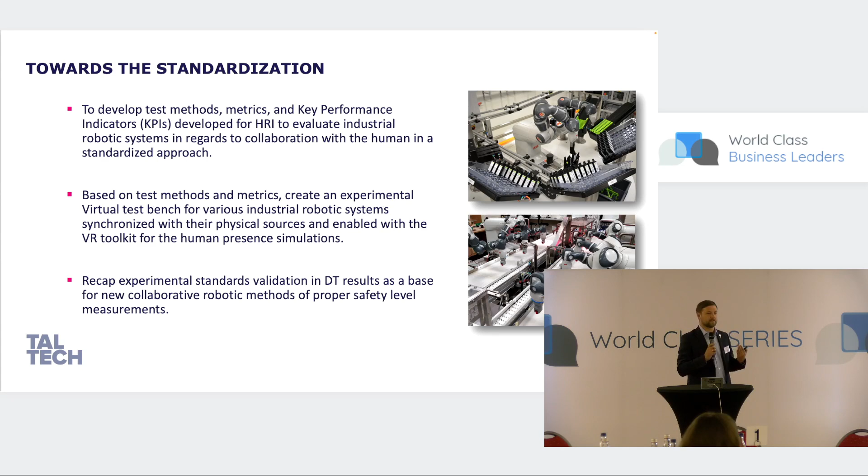The development of this is based in our lab. We have a robotics and flexible manufacturing demo center, which consists of various brand robots, logistical robots, and physical industrial robots. We also work together with a few institutions on this, and we're looking to increase our use cases and have more research, and not only research, but maybe industrial labs in our domain.

We work with some Danish institutions, US institutions, and right now, as I'm in Ireland, also an Irish institution, and we connect them virtually together. They are all copies, digital twins of physical rooms, which we connect virtually by means of social VR - speaking with each other, multiplayer modes, etc. In all of those we collect data - that's the main aim of it.

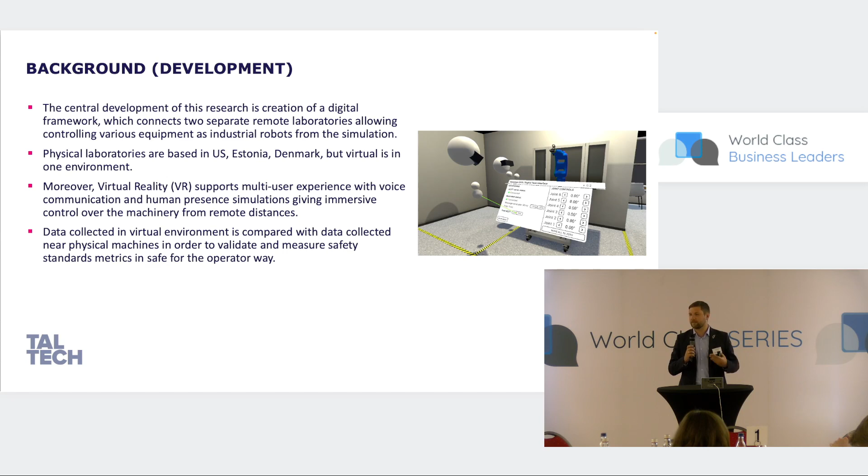We develop it in a modular manner. What we're developing right now is a framework based on a game engine, where if we need to measure, for example, a user's one-off experience with exact sensors, we download the package. So we're making a framework of different packages for user evaluations - but it's work ongoing. That's just a few pictures of our lab and its digital perspective.

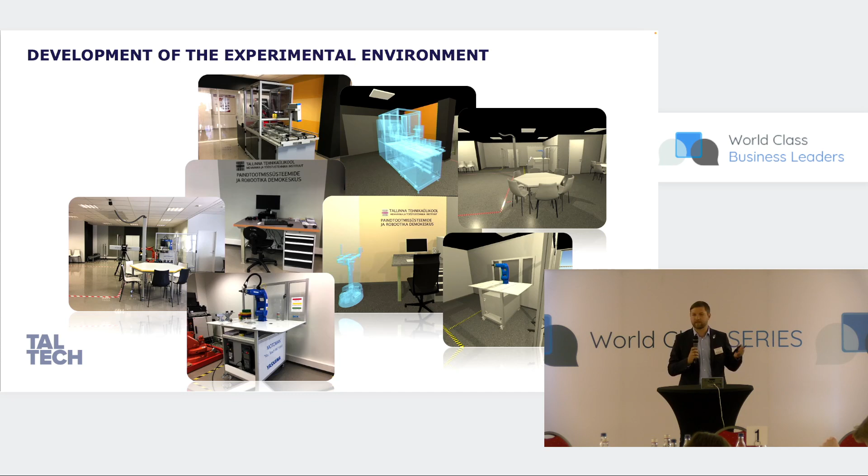It's already been updated, with more robots added. We have two floors of our building digitalized, based on a BIM model. We put it live and made it a multiplayer game where students during COVID could also learn pneumatics. We have some pneumatics and hydraulics games, and robotics applications to run on.

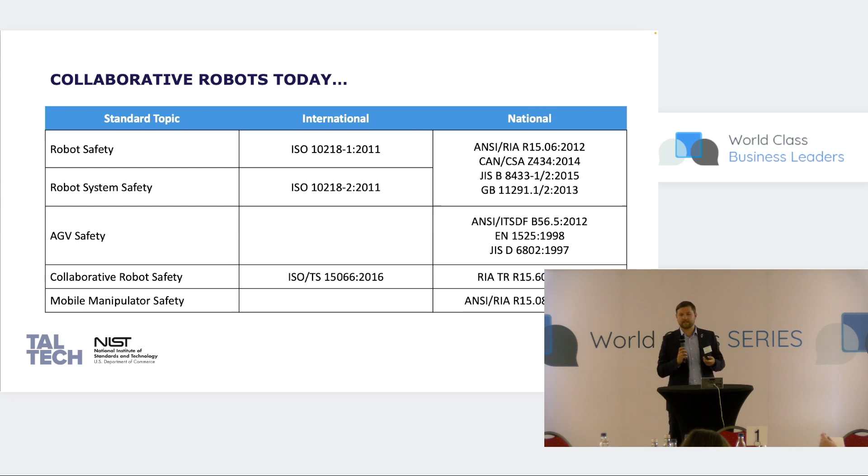Is human-robot interaction a problem? As you can see, there are plenty of different standards regarding collaborative robotics - industrial robots, AGVs (ground robots), drones, UAVs, and various standards. There is no single standard that collects all the general methodologies into one. As we are not standards experts in our institution, we work together with NIST, so these slides are partially borrowed from them, with whom we do some joint publications.

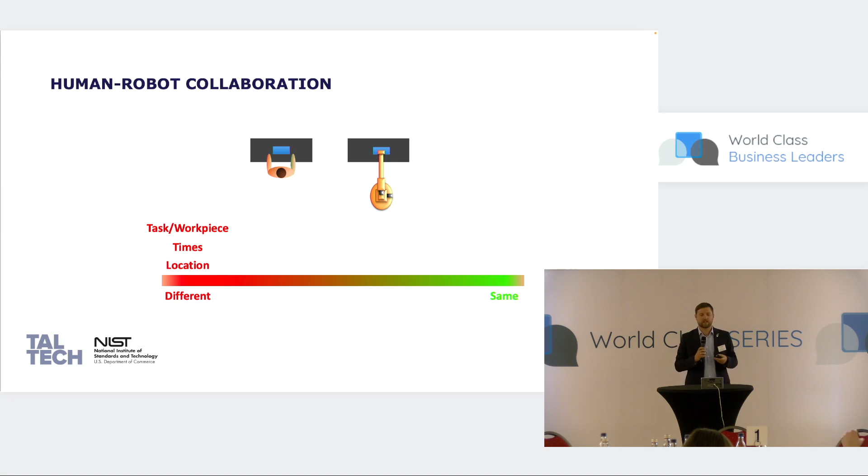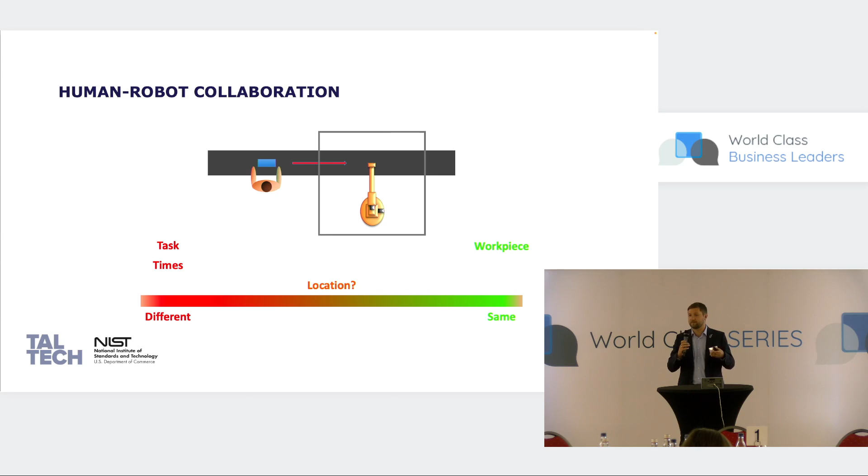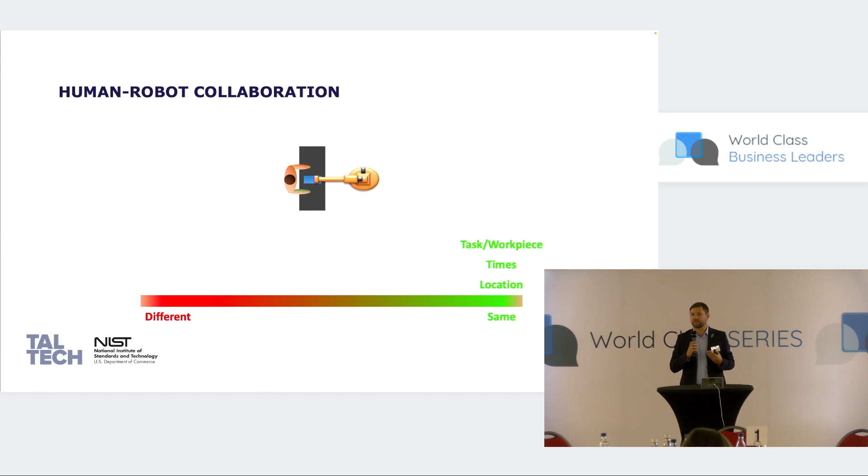But basically there's a need, because robots and collaborative robotics—my main work is on heavy industrial robots, not cobots—but they are inevitable in different domains, not only industrial but also construction and healthcare. Digital twins, and I think the digital twin embedded with virtual reality gives more immersion, as I was speaking today about educational applications, and not only that, they can really be the interaction tool with physical machinery.

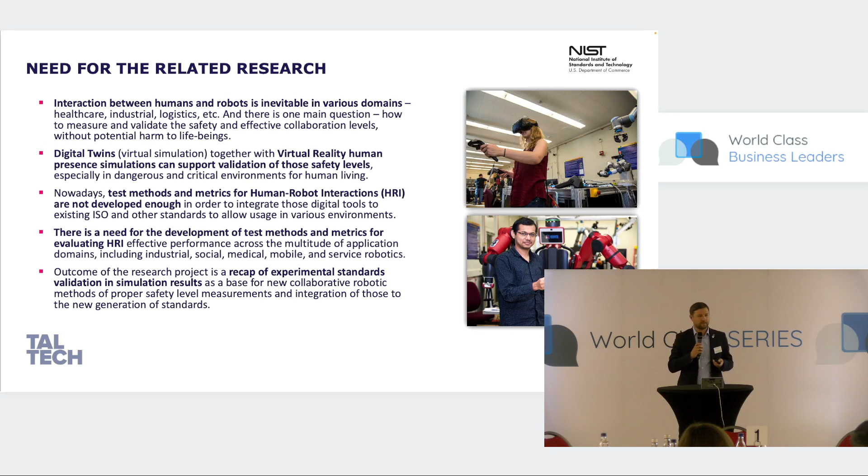As the user will be allowed to think more about the final aim of what they need to do, rather than learning all these programming languages of different robots. So it also can solve a learning curve, and it can address aging problems too. And yes, all these experiments, as a recap, are used in the new generation of standards. Okay, this will be in the next slide.

Sorry, but basically we collect different types of data—this is only a part of what we're collecting. When we do a physical robot test, we simulate interruption to the robot. We put something next to the robot to see how the safety sensors will work out.

Also, what we do is control physical robots in real time through VR—I'll show some videos later. And basically, when a person in virtual reality approaches the virtual robot, the physical robot behaves as if someone is next to it. This way we can collaborate and enable a safe environment for testing the standards.

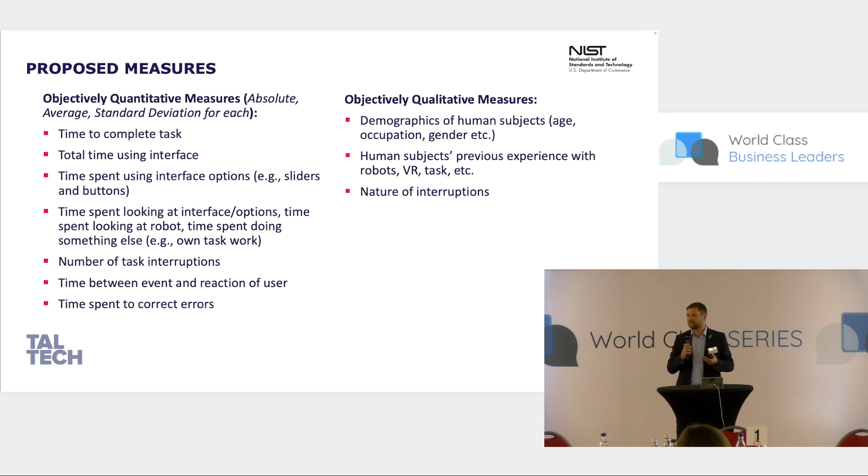As part of an IEEE group, of which I'm a regular member, we develop a new iteration of standards which should be active in a few years. We work in different subgroups on different domains of study, so it's a big study group—more than welcome to industrial partners as well. There are always people from around the world, from each continent, and a few industrial people as well.

And that's why we do all of this. So, to be more concrete, I will show you some videos of what we've been involved in over the last 4 or 5 years. What you'll see is only high level, a visual representation of how we do it, but basically, in the back end, it's much more.

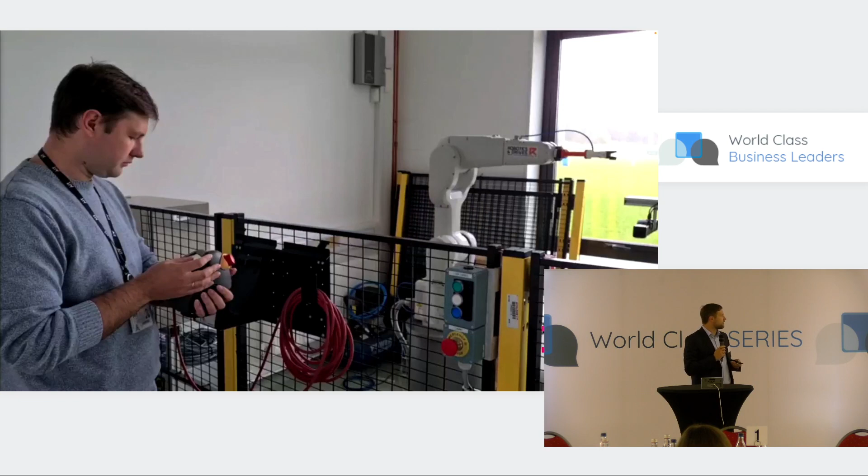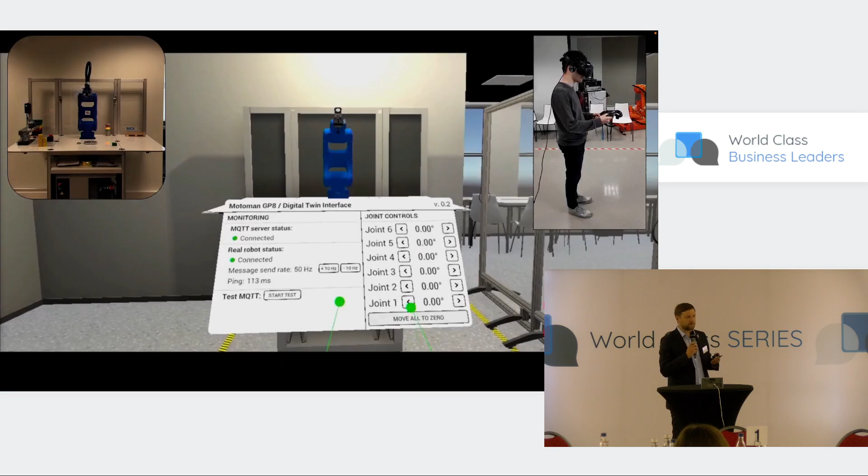So what if we speak about robot programming—is this a convenient way to do it? Of course, we have offline programming tools where we program in the computer, or maybe we do it remotely in VR. Interfaces are numerous; we have a lot of different interfaces based on what use case we need to solve, or maybe AR—using a HoloLens 2 application can be viewed. We can also do it from phones and different applications.

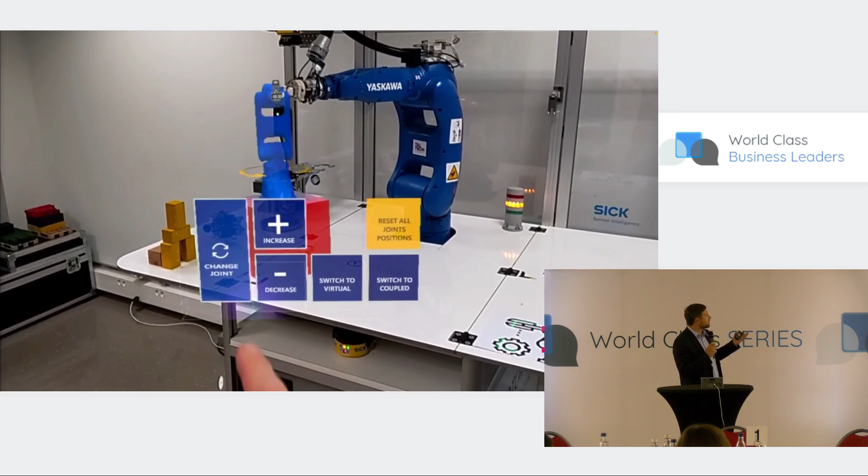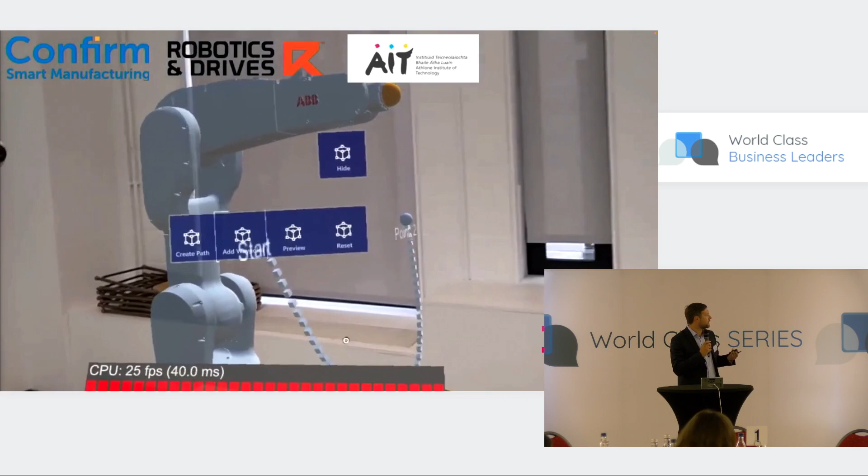This is only a movement of the robot, but movement of the robot is nothing special—we just control different angles and move it around in real time. But we can also plan, make a trajectory, solve the kinematics problem, and then launch the robot online to execute when it's ready, merging coordinate systems.

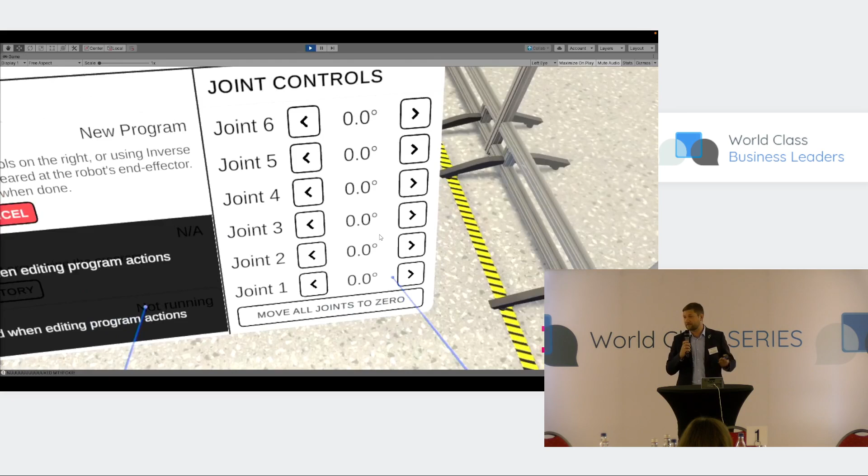Or maybe a mobile app is totally convenient—this mobile app, for example, has 5 different robots embedded, and we can control our lab. It's not only this; we collect a lot of data from each machine, their efficiency, power consumption, how many products were done. Of course, we're a research lab, so we don't really produce, so we don't have a lot of statistical data from this testing.

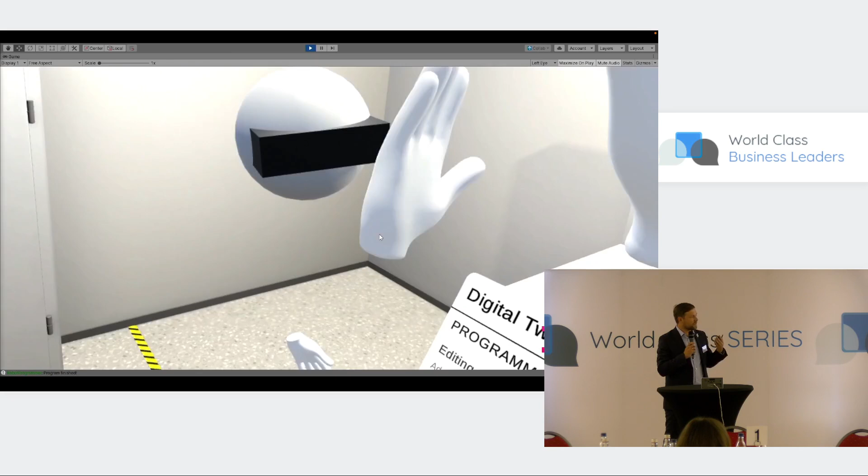Or maybe it should be social—maybe you can work together, maybe across different countries. I know this goes maybe too deep into the current speeches about metaverse, etc. However, it's there, and in my opinion, from the virtual world we can really interact with the physical world, and from the physical world we can interact with the virtual world. It shouldn't be so limited.

In VR, I should see a person who wears AR glasses, and in AR, see who wears VR glasses. It has a larger impact, not only for the industrial domain. Where we also work is smart health, for example—we have 2 rehabilitation applications based on what we've done. We've evaluated how users are moving, together with a hospital, though we're not medical doctors.

Based on that, we made some physiotherapy applications for COVID time, when they only gave a camera to the user, with nice games playing around, but actually it was muscle training for post-stroke patients, for example, and different simulators. All this is connected, and it's a larger impact, in my opinion.